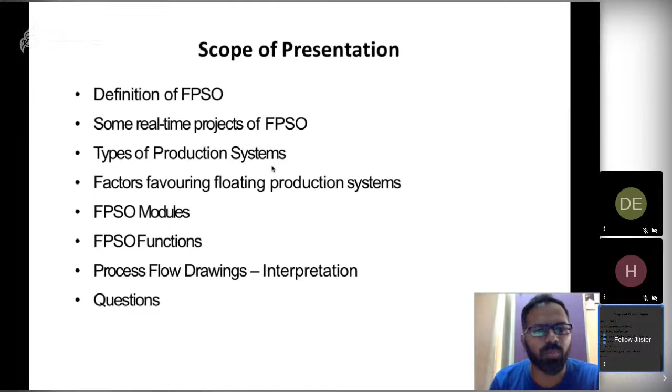So, basics of ships and offshore production, a brief process overview. That's the presentation topic for today. The scope of the presentation, what we're going to see today: we'll see why FPSOs are used in offshore production, some data and projects of FPSO, types of production systems, what are the different types they use in offshore production, and what is the factor that is favoring the use of offshore production. In offshore production there are a lot of modules, so we will see a few modules that are used in offshore production, their functions as well. And I'll give you an interpretation of the process flow diagrams, and we can move for questions. If I run a little faster, just correct me to slow down so I can slow down. So this is pretty much the scope of the presentation for today.

And okay, asking everybody a question. About 2/3 of the surface of the Earth is covered by water. So it's actually about close to 71%. So we have the remaining close to 29% land area. So we have refineries, oil exploration, drilling of oil.

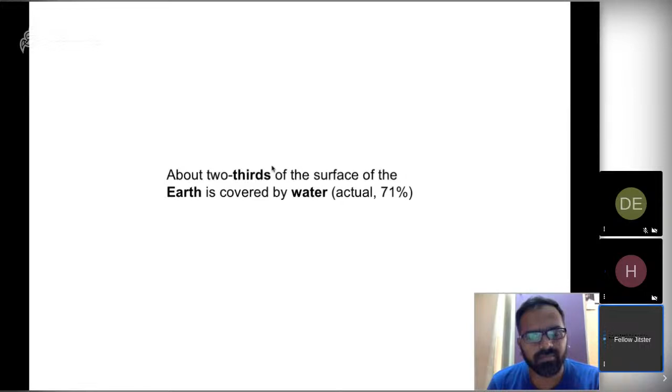Excuse me, sir. Yes, sir, there's some bandwidth problem, I think. Can you please turn off your camera and then present it? Yes, sir, because the camera also tries to take some bandwidth. So try to turn off the camera and then go for the slideshow, sir. Okay. I've turned off the camera. Is the slide visible now? Now we have some clear audio. The slide is available, okay. Is the slides visible? Okay. Yes, sir, okay, can I proceed now?

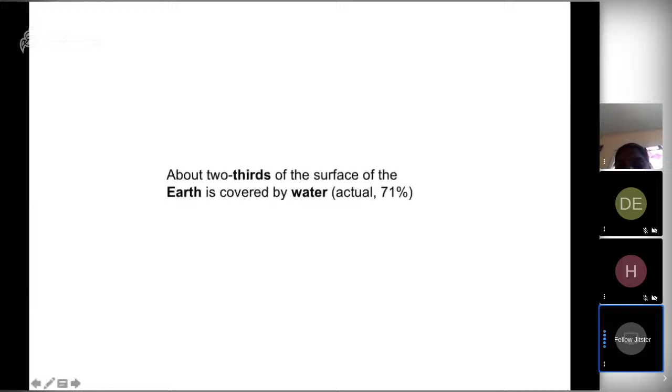Okay. When it comes to drilling and production, there is a difference. Drilling is exploration. When you want to find out if a particular area has oil or gas, it is called drilling. When you already found out that there is oil in that particular location and you start producing, it is called production. So drilling is done by drill ships. Production is done by FPSOs. So FPSOs are not drilling vessels but production vessels.

After we have found out there is oil and gas in a particular well, we move the FPSO to that location and start producing. Whereas drilling is done using drill ships and semi-submersible drilling vessels, which find out there is oil using seismic studies, then drill the well, confirm there is oil, cap it, and move on. So there is a difference between drilling and production. That is to be known. Next is how they drill it.

Okay, now we have found a particular GPS location in the Indian Ocean where the seismic study has confirmed there is oil and gas. In a well, there will be oil, gas, and water, all mixed together in ratios. If the oil ratio is high and gas and water are low, it is called an oil well. If the gas ratio is high and oil and water are low, it is a gas well. If only water content is high, it is just a normal water well, and it will not be considered for production. It is not feasible to spend so much money for that little oil and gas, so they will not produce from that well.

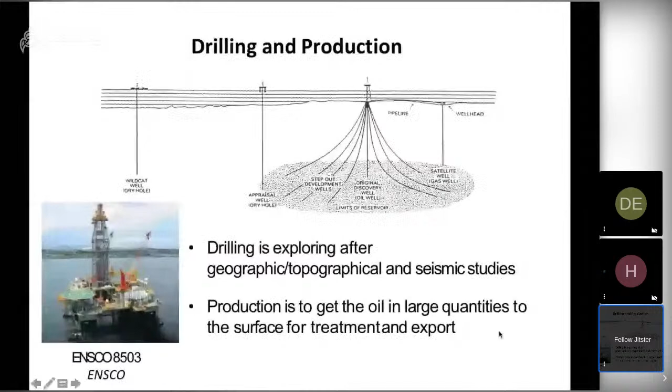After this drilling is completed, the casing... Excuse me? Excuse me, sir? Yeah. Sir, if you are changing slide, we are not able to see the changed slide. We have only the second slide available. Can you see that now? About 2/3 of surface, that slide alone is available. How do I do that? Can you see now? No, sir, it's a blank screen. Now it is available. Drilling and production. That slide is available. I'll change slide. Can you just check if it's changing? Is it changing now? It's changing now. It is changing.

Okay. So this is the about 2/3 of surface of water. This is the slide. And then I was talking about the definition of FPSO. Then we have examples of FPSO. So you can take down the names of these FPSOs and Google it for more information. The next slide is drilling and production. The difference between drilling and production, this is what I was talking about.

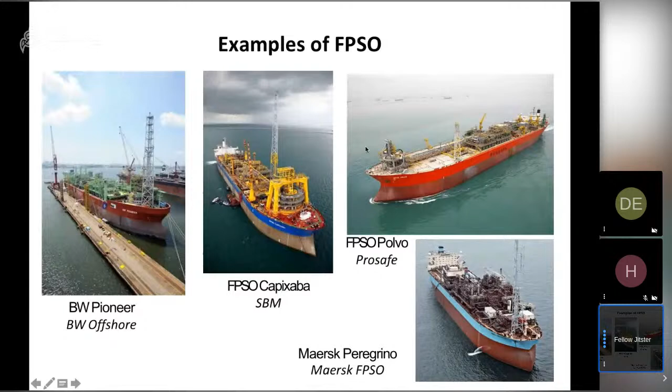Then we have to find out how it is done. So how is the drilling and casing done? Using a semi-submersible drill ship or a normal drill ship, you do the drilling and you case the drilling site with the mud and cement casing. This is normal unidirectional drilling, but nowadays we also use horizontal drilling and directional drilling. So if it is unidirectional drilling, like how you have a borewell in every house, everybody has to do a borewell individually.

But when you have a neighbor and he drills 500 feet and he does not get water, whereas in your house you drill only 100 feet and you get water. The neighbor is just 20-30 feet away from your borewell. So what he can do is a directional drilling from his house towards the well from which you are getting water. He can drill through his house floor, but turn his direction after 20 feet, move diagonally towards your house well, and he can pump water.

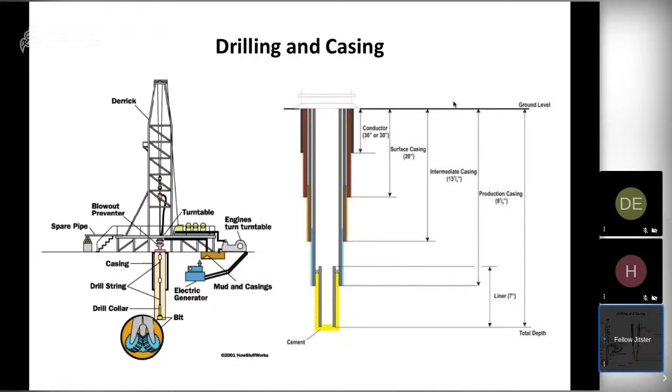So similarly in drilling, you save a lot of money if you do directional drilling, because you don't have to drill a lot of unidirectional wells to pump oil from the same well or nearby wells. Okay, well completion. When you have found out through seismic studies and other geographical studies that there is oil in this particular part of the world, then you move a drill ship or a semi-submersible drill vessel, drill a hole and find out, okay, there is oil here. This is good for production.

So after that is ready for production, you decide to plug or complete the well. Plug is just plug the well, move the vessel out and start producing after 5-10 years, because now I don't have money to produce. Otherwise, you decide, now I have found oil here, I'll immediately start production. So if you're not producing immediately, you plug the well. If you're producing immediately, you complete the well. But how do you complete the well? You remove the blowout preventer.

Blowout preventer is a kind of non-return valve which sits on the top of every well before production. So if you decided to produce oil from that well, the blowout preventer is removed. You fit a Christmas tree. It is just a valve manifold, a big manifold with lots of valves, so that whatever comes out of the well, crude oil, gas, and water, is directed through many pipelines. That is called the Christmas tree.

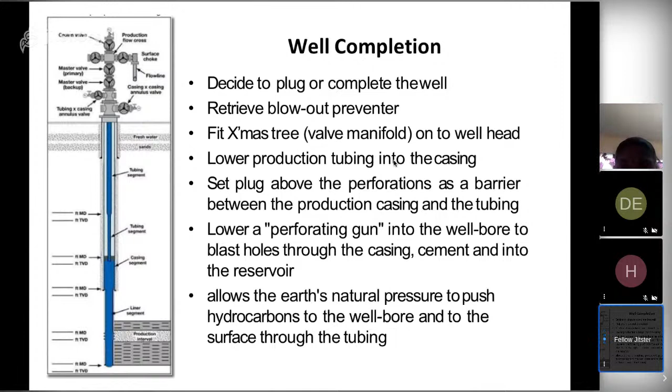Okay, we have different types of production systems in offshore. This is basically decided on the environmental condition. If it is shallow water, only 100-meter depth, then you decide to go with a jack-up rig. The jack-up rig is a rig which has 3 legs, which jacks up on the surface of the earth and then starts producing. Then you go to tension leg platforms, which are platforms which float on the water, and then a mooring line is fixed to the seabed, and then you start production.

If the water surface to seabed is 100 meters to 150 meters or 200 meters, up to 300 meters, you can use jacket rigs. Beyond that, you use tension leg platforms up to 700, 800 meters below water level. And then above 1000, you start using drill ships, FPSOs, or semi-submersibles up to 3000 meters. So very deep sea drilling is mostly done by semi-submersibles, and semi-submersibles are the biggest capacity offshore production platforms. So that is the different types of production systems used in offshore, and we are concentrating for today's topic on FPSO alone.

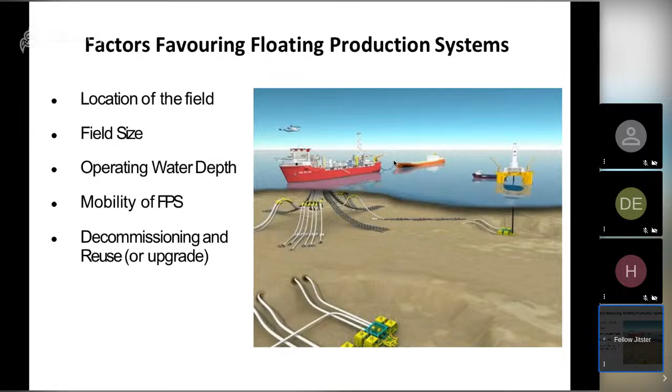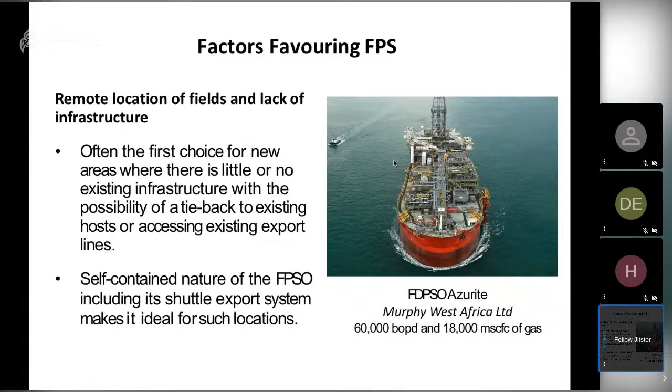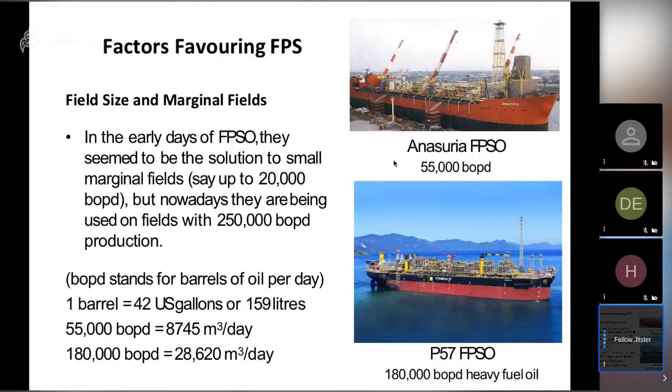Like today, the ship can sail, anchor, and start production from tomorrow morning. So that is how quickly an FPSO can start production. That is the advantage of using an FPSO. The field size and marginal fields: even for small fields where the capacity is only for 2 years or 3 years, you can still use FPSOs because it can be decommissioned and moved to a new location very easily. So FPSOs are favorable for all reasons.

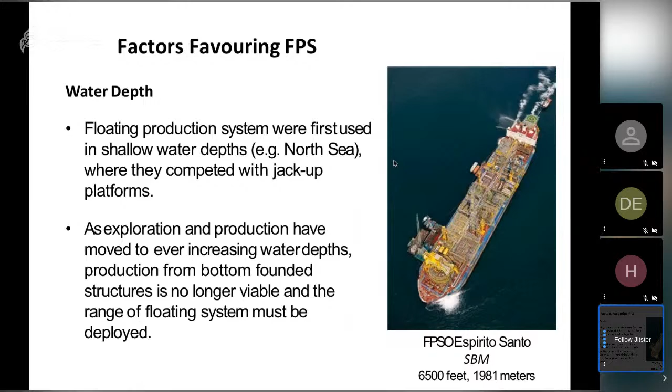So as exploration and production have moved to increasing water depths, production from bottom founded structures is no longer viable, and a range of floating systems must be deployed. So there's a lot of new exploration and new areas where FPSOs are used. Very fast. 8 knots is like 16 kilometers per hour. So from this part of the world, in 15 days you can move to the other part of the world. So an FPSO can sail to new locations faster.

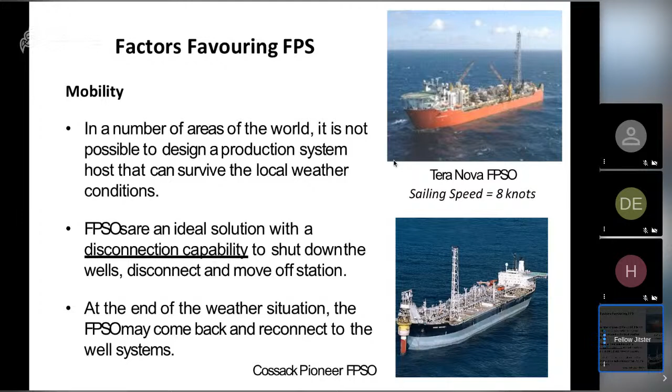It can disconnect. It can be decommissioned very fast. It can work in all weather conditions, very bad weather conditions. It doesn't matter. It is a ship, so it can sail and stay there, anchor, and start production immediately. So these are the benefits of using an FPSO. At the end of the field, the FPSO is decommissioned. Like after 10 years, the well is empty. There is no more production capability. It can be immediately decommissioned in a few days' time and moved out to a new location.

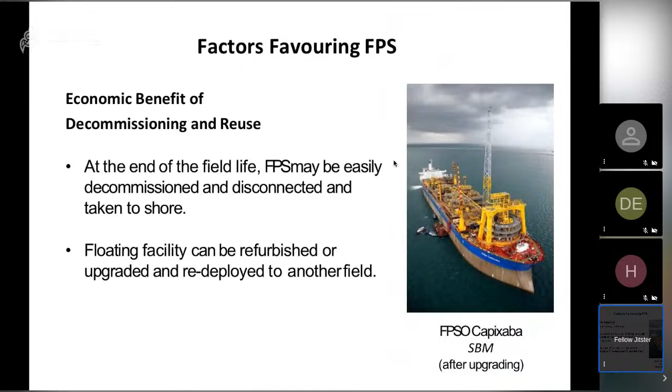The advantages of FPSO in a summary. So the economic benefits of utilizing and upgrading floating facilities. It is not a new ship which is built from cutting the metal. It is an existing ship which is already 20-25 years old. We take that ship and convert it into an FPSO. So it is like buying an old car or a bike and changing it into a floating refinery. So it becomes economically beneficial.

In many cases, in remote areas where other vessels cannot go, this FPSO can go there and start drilling. Even for small fields, only 1 year or 2 years of production, installing other vessels is difficult, but you can move an FPSO and start production. The water depth is not an issue, climate is not an issue, small periods of production and small capacity wells are not an issue. So there's a lot of advantages of using an FPSO.

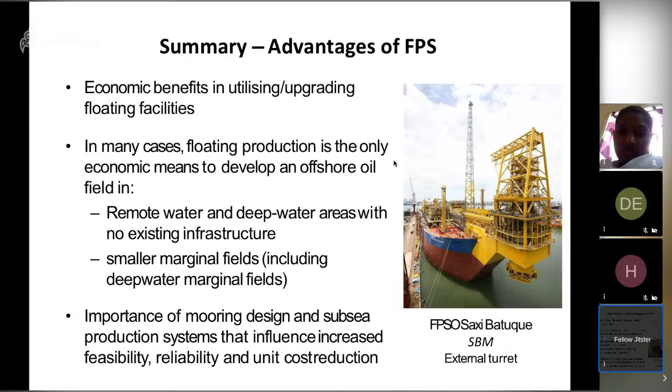Okay, how is a vessel converted into an FPSO? This is the basic structure of an FPSO. As I earlier mentioned, it is normally an existing vessel or a ship which is converted into an FPSO. So you have a ship which is 20-25 years old. You take that ship, take out all the top modules, clean it off like a normal football field, and then you plant every module, one module by one module.

The two higher structures, hope you all can follow my mouse. This is a turret and this is a flare. This is extra gas which comes, it will be burnt. This is a flare stack and this is a turret. So this is an internal turret. There are FPSOs which have an external turret, like a cantilever beam on a basketball hoop. So in some ships, this turret is positioned outside the hull in this area, but in most cases it is done like this.

As an engineer, I prefer ships which have an external turret because it is easy to have these mooring lines and incoming pipelines visible all the time above the water level. In these FPSOs, all the mooring lines and anchoring lines are below the water line all the time, and you have a lot of difficulties in maintaining the pipelines and production lines.

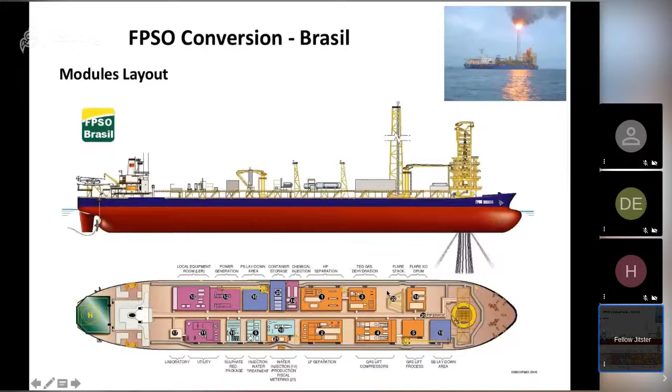Oil separation is done in module 1 and module 2. Here you have 120,000 barrels of oil per day that is done in the first and second module. Gas compression and treatment system is done in modules 4, 6 and 7. So 118 mmscfd of gas is produced in modules 4, 6, and 7.

Water treatment systems are in module 9 and 10. We have 90,000 BWPD of oil water that is treated for re-injection into the well.

Utility and power generation is almost 6 modules, and Alstom is the one monopoly which produces power generation systems for FPSOs. Most of the companies associated with FPSO equipment supplies are monopolies. There is no competition there, because they're age-old companies which have learned a lot of things and patented it, so it is very difficult for a new company to come and compete.

So Alfa Laval is for separators, Alstom is for power generation, Wärtsilä is for automation. If you're an instrumentation engineer and want to pursue a career in automation, you should look into this company called Wärtsilä. Wärtsilä is an engine manufacturer; MAN B&W and Wärtsilä are two monopoly companies, like Alfa Laval, ABB.

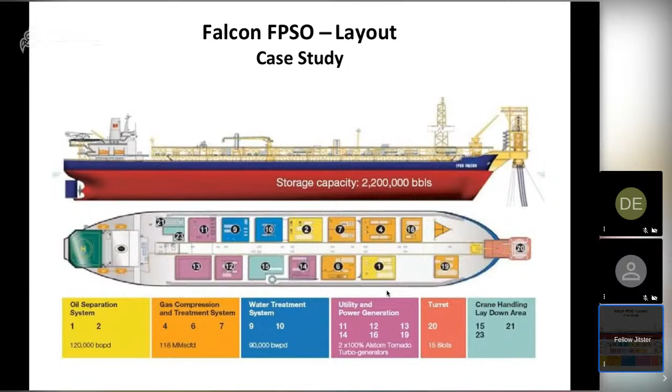Most of the instruments are Georg Fischer Instruments or ABB. These are the two companies which provide instruments. On land-based refineries you'll find a lot of other companies competing, because to get approval for a product in a land-based refinery, many companies compete and easily get approval. But for an equipment to get approved by IMO, the International Maritime Organization, and to be installed on a ship surface or floating rig is a big process. So it is very difficult to get into that market, and they usually have only 1 or 2 companies that do it.

FPSO Falcon is an example of conversion, where a normal ship is converted into an FPSO. This works for ExxonMobil; that is the company.

Process equipment - what are the process equipments used in an FPSO? On the turret, you have the FPSO mooring system. The turret is where the entry of production oil comes into it. In this ship you can see an external turret, which I was earlier mentioning. The advantage of having an external turret is that the pipelines and mooring lines are always visible. From an operational perspective, as an engineer, I prefer this, and this is better.

Top sides - the top of the ship is called the top side, and the top sides have modules. As I earlier mentioned, oil, gas, and water processing facilities are on the top sides.

What happens in the bottom part of the vessel? In the bottom part of the vessel is where whatever produced oil is stored. So crude oil storage, accommodation, services - when you say services, close to 25-30 people live here on the ship, so they all have to stay here. This is the accommodation block.

Here they have a kitchen, a gym, and a normal life after work can be here, and they also have an engine here for moving from one place to another. We have an auxiliary generator for power, and all this is in this part of the ship.

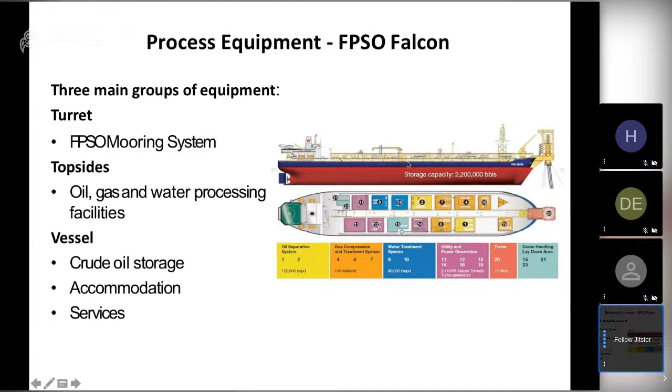So to look into a turret, this is an external turret - I like the external turret, and sometimes they also call this a riser. It serves as a mooring system to which anchor lines are attached - all the anchor lines are attached to this, along with production lines. This allows the vessel to freely weathervane, like it can take a 360 degree turn like a compass, and move around due to weather, wave, or wind or any environmental conditions.

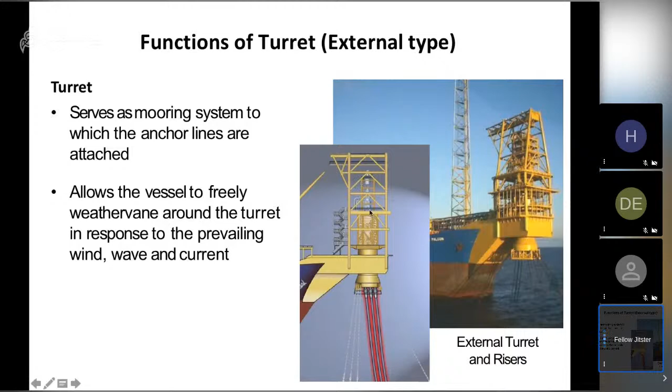So this is the turret which we already saw. Again, this is an external turret, which is outside the ship's hull. This is an internal turret, which is inside the ship's hull itself. So these are just to show external and internal.

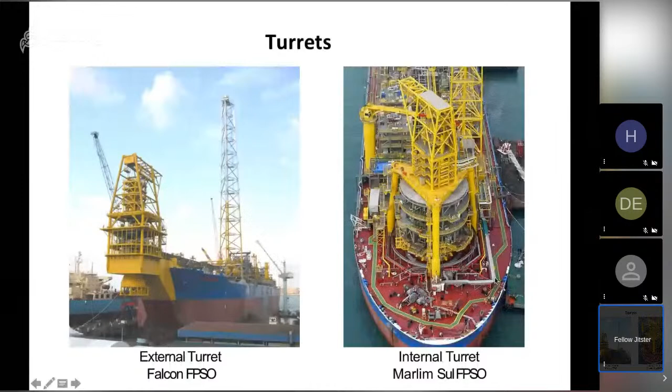Swivel - this is actually a part of the turret. It conveys incoming fluid, which passes through the swivel first to the fixed part and then to the rotating part of the turret, and to the topside processing facilities. It comes in at high pressure, so it rotates and separates at different pressure levels to the rotating part of the turret and to the topside facilities, where we separate using a high pressure separator and low pressure separator to separate oil, gas, and water.

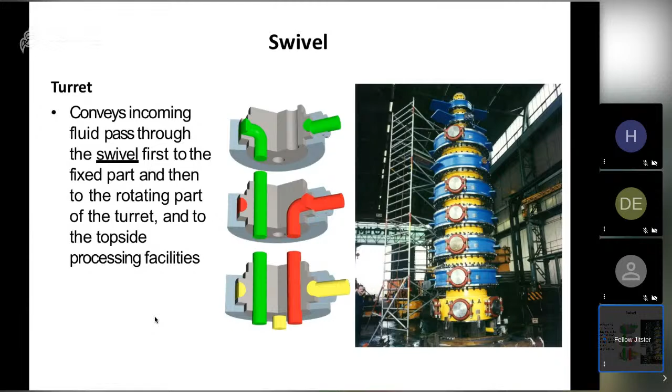Functions of topside processing equipment. Oil comes through these lines to the turret, and from here it moves to module 1, where oil, gas, and water are separated. Then it goes to the high pressure separator, then the low pressure separator, where again oil, gas, and water are separated, and further goes into the storing capacity.

After all the oil is stored in this part of the ship, a tanker ship comes - you can see a small ship here behind, but it's actually a big ship, it just looks smaller in the picture. So every 2 or 3 days, depending on capacity, the production stored in this FPSO is transported to this oil tanker, which takes the production to the nearest refinery, maybe Reliance or wherever. If it's in Africa, Saudi, or Iran, it moves it to the nearest location.

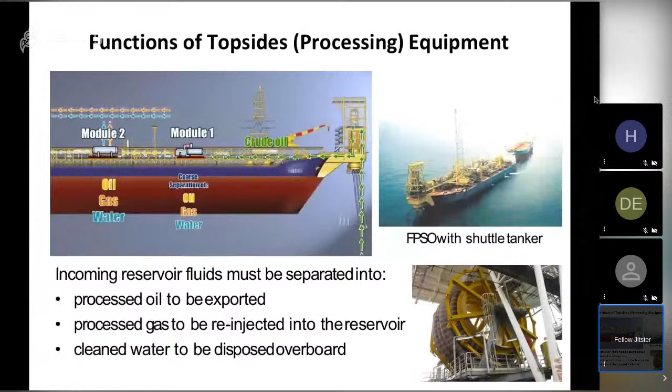You have all safety checks done, and then the complete module, for example module 1, is completely lifted and placed on the FPSO. This is manufactured in a shipyard by module. Module 1 is manufactured, then lifted and placed into the ship. Then module 2 is manufactured, then lifted and placed into the ship.

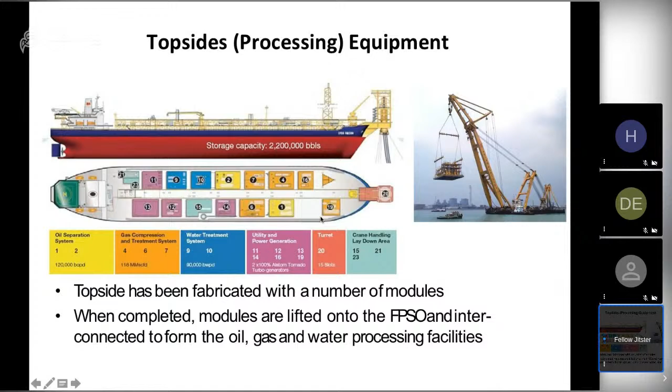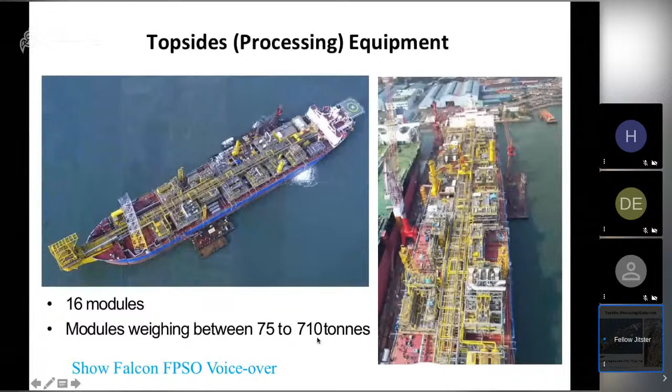So how many modules are there? There are close to 16 modules on an FPSO topside. How much does a module weigh? It weighs about 75 to 710 tons each, depending on what process it does. Module 1 has the HP and LP separator - I already talked about this. High pressure separator and low pressure separator - these are the two separators in module 1.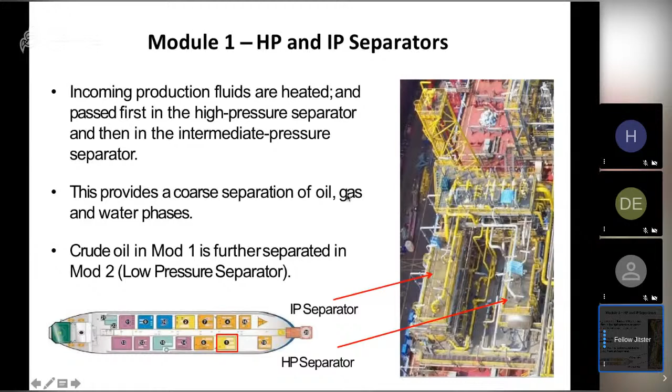You have different technology according to site requirements - if the crude has different qualities, you use different types of separators. This is a horizontal 3-phase separator, high pressure. Then you have a low pressure separator in module 2, where the produced products of module 1 come in, and the same separation is done but at low pressure, since water, gas, and oil are already mostly separated. Now you want to further refine it - remove small water droplets in oil, remove oil in water, and remove gas. That's what the low pressure separator does, and then the produced oil moves to the cargo tanks. All over the bottom there are cargo tanks used for storing the production from module 1 and 2.

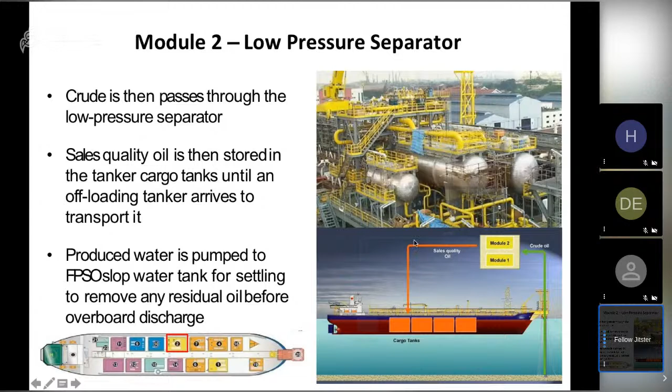The high pressure gas compressors - when it's a gas field, or you want to use the gas for oil power production on the ship, you use module 4, where gases from module 1 and 2 go to the module 4 gas compressors. When you have to maintain and sustain well pressure, you re-inject the gas into the reservoir itself. But in some cases, if you don't, you inject only water and flare the gases.

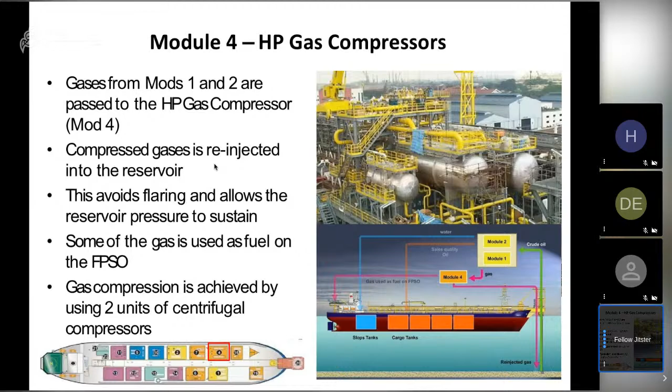Module 7 is for flash gas compressors - you use screw compressors in this module to flash the gas as required. Low pressure gas, separated from crude oil in module 2 and the separator in module 1, is compressed to a pressure where it can join the produced gas at the inlet of the main gas compressors. So depending on the situation and requirement, this is basically where you either flare the gas or use it, and this is done in the flash gas compressor.

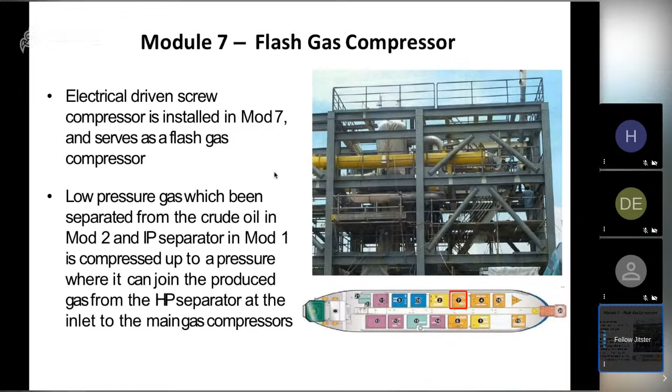You have screw compressors, another type of compressor where high pressure gas from the main gas compressors must be further processed to remove water. To remove the water, you inject it into a screw compressor, which removes all water particles from the gas. This drying is achieved by module 6, where glycol is used to absorb the water. There are different chemicals according to the requirement. In this particular site, glycol is used, whereas in another site where the gas composition is a little different, glycol plus certain other chemicals might also be required to absorb the water.

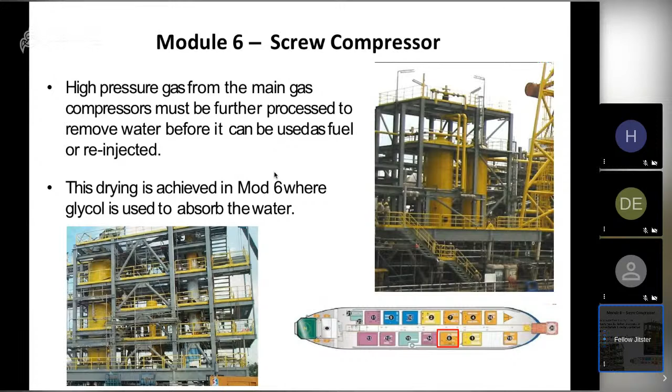When you have this kind of offshore refinery, you will need a lot of heating and cooling utilities for pressure, and to maintain the pressure lines, the steam lines and all that. Crude oil needs a certain temperature to move; at normal room temperature it will be frozen, so it has to be heated. So all the pipelines used for transporting crude oil from the production lines to the storage lines are heating lines. All the pipelines have a heating coil and then are insulated, so users can touch the pipe and nothing will happen, but the pipes are always heated so that pumping and movement is achievable.

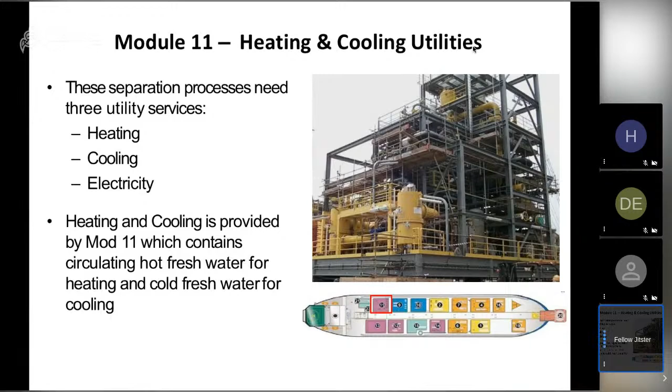Siemens has a gas turbine, SGT 500. SGT 500 is the only gas turbine in the world which can run on crude oil as a fuel. We also have gas turbine research going on in India for the last 25 years, and the name of the gas turbine is Kaveri. India couldn't fund the project after 20 years, so now France is funding the project. I work on a working group on that, and the project has been put on hold for a long time. That is also a gas turbine which can work, the lightest gas turbine India is manufacturing, being worked on at GTRE in Bangalore. So this is something related to gas turbines.

When that gas turbine comes into application, you'll be using such a gas turbine. But as of now, in the market, you have the Siemens SGT 500, which is the only gas turbine in the world that can run on crude oil as a fuel. So you need a lot of power, so you need a gas turbine to manufacture power.

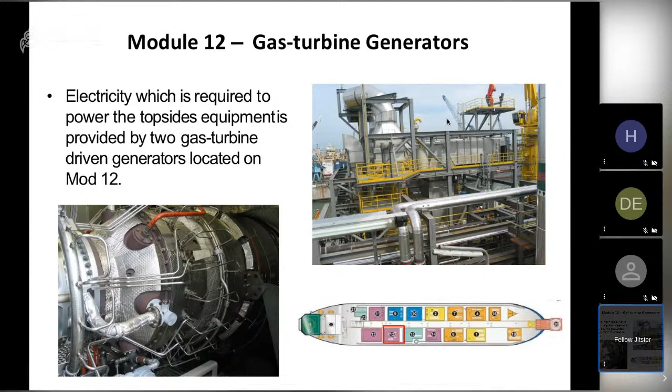These are local equipment rooms for purpose, like you have to have a power distribution to all switch gears located inside the equipment rooms. You need a lot of air conditioning and all that is there. So you use a local equipment room as a module.

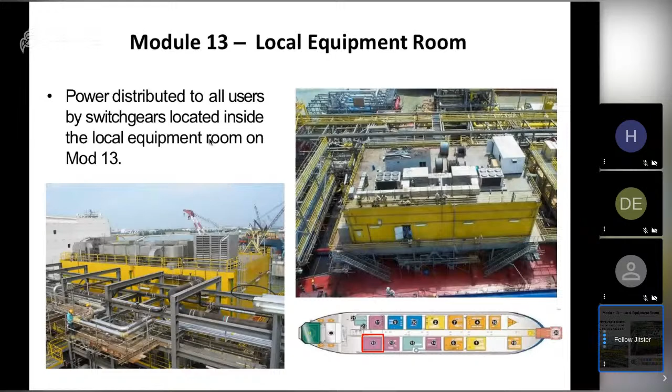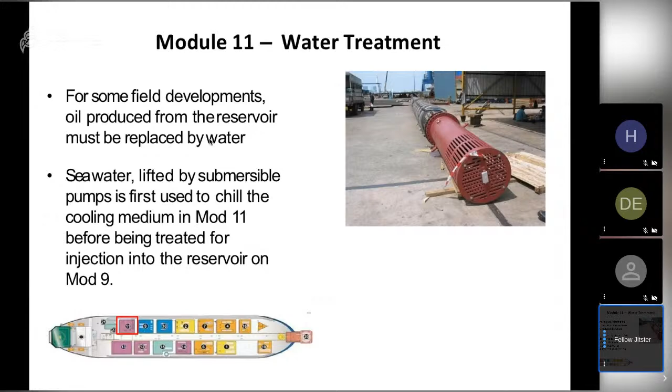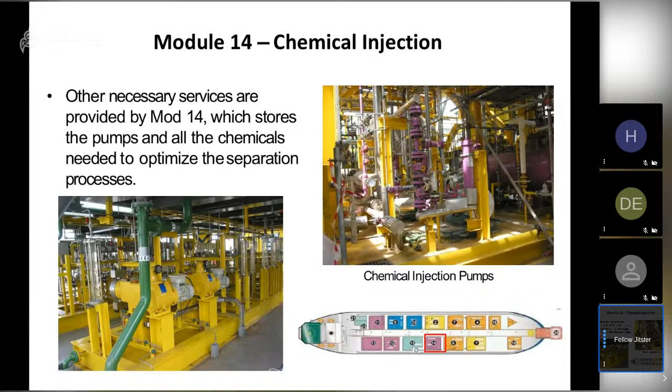You need methanol injection. Okay, gas hydrate is a completely different process. Methane hydrate, sometimes they call it methane hydrate or sometimes they call it gas hydrate. This is kind of a complete chemistry thing where methanol storage and related pumping equipment, test separator and the storage of dispersants are in this module.

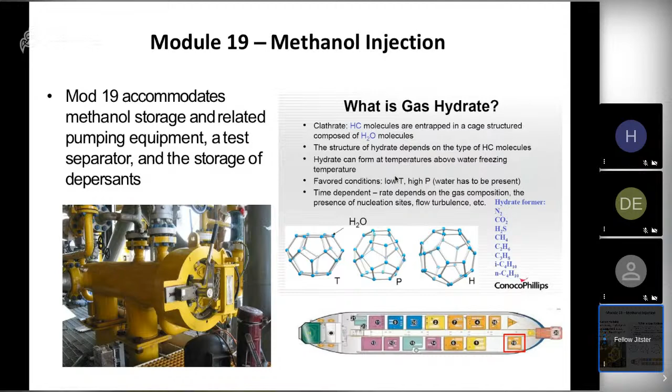This is more of an R&D kind of system where, on a daily basis, you take a little amount of crude oil and test the quality of it and tell, okay, this is the amount of crude oil, water and these chemicals coming out. So you decide on the production, okay, this is how our yield is going to be. So this is kind of an R&D setup module, methanol injection module.

Okay. So again, going back to module 1, this is how the primary production system works. When well fluid comes, it goes to a high pressure separator, gas goes to a compressor, oil goes to a low pressure separator, water goes to water treatment. The low pressure separator sends whatever gas comes here back to the compressor and gas dehydrator and pumps the gas to the pipeline.

But if this is a very small quantity, it directly goes to flaring and it is flared. After the treatment, water is discharged or re-injected into the well based on the requirement. Oil, after removing the further gas, has the water separated as well. It goes to the storage, which is below the FPSO. So this is oil dehydration using chemicals, and then the oil goes to the liquid pipeline or to the tanker to the refinery.

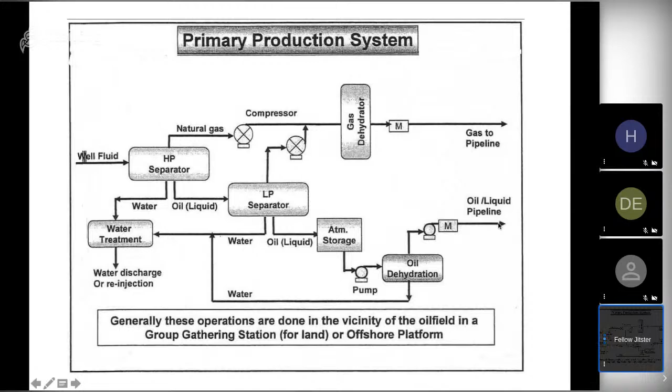You will have to see a complete setup of the modules as well. So I'll show you this.

Can you see the construction module? Harisha, can you see the construction module? Hello? Can you see the construction module slide? No, sir. Which slide do you see, ma'am? Sir, the screen is plain now. Okay, ma'am, I'm sharing it again. Can you see now, ma'am? Yes, sir. Now you can. Construction module 1, sir.

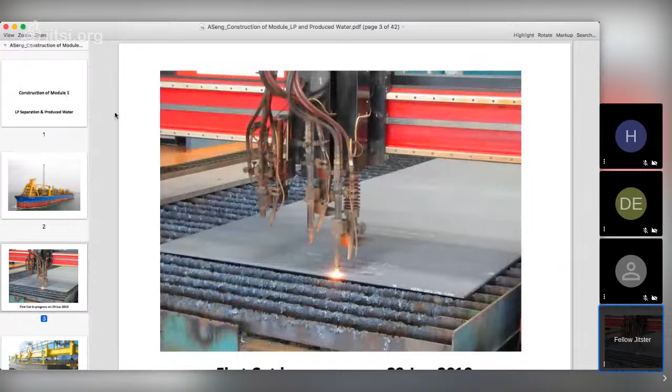Yeah. So now we will see how a module is constructed in a shipyard. This is module 1. We are going to see only one module, and I will go through the complete process of how a module is manufactured in a shipyard. So this is an FPSO, and it has complete modules on the top. First you have steel plates, steel cutting it is called. You use automated robots to cut the steel as per your drawings.

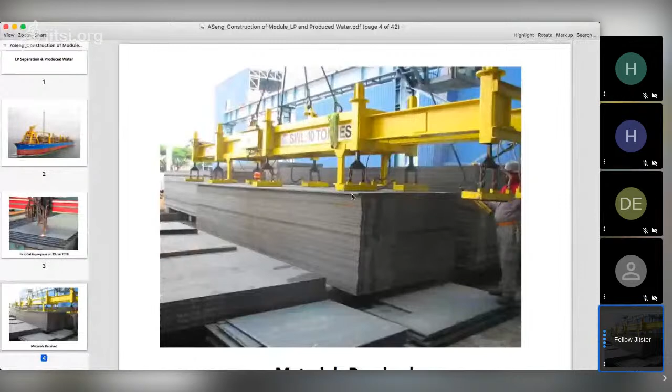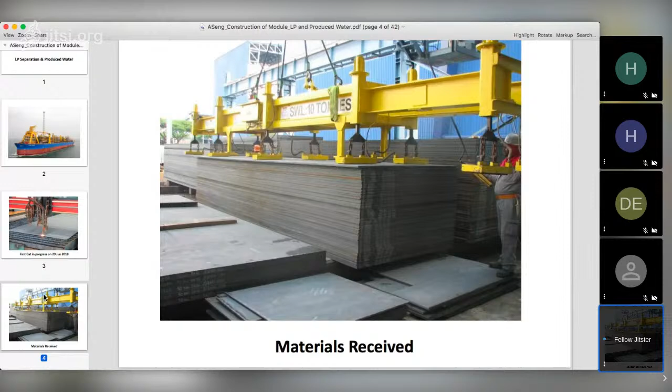The next step is you will have a lot of raw material, a lot of steel plates like this coming into the yard. You will have automated robotic lifting of steel plates. Nippon Steel, from Japan, is a major manufacturer of these steel plates. So materials come into the yard, they are lifted using automated lifting systems, and then cut according to the drawings using automated robots.

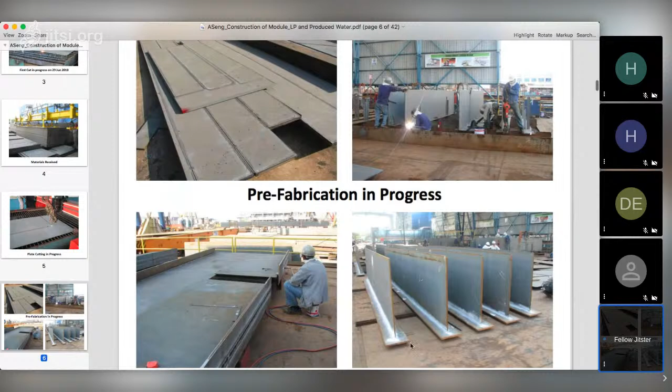Then you have prefabrication in progress. You use automatic robots and also welding labor to cut and build a prefabrication of module frames. Each frame is built, then you have further fabrication of each frame, each section frame is aligned, and then support of each section frame is provided, for the welding.

This process of producing a module takes a team of 100 to 150 members close to 1 year for the manufacturing of one complete module. Most of the equipment installed in these modules is not off the shelf; companies like ABB don't manufacture and keep it. They only start manufacturing it after we place an order.

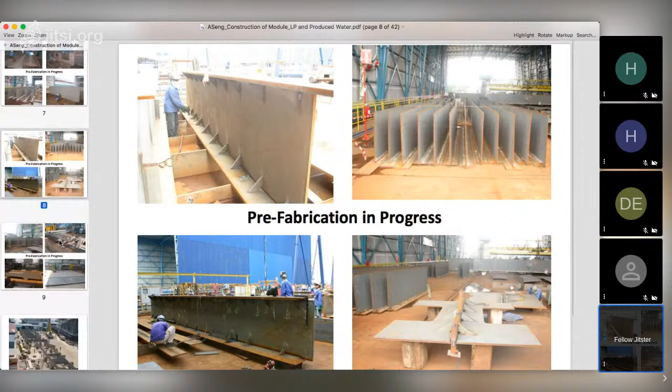This is to keep the cost low. If it is produced and kept on the shelf, the product cost goes up, so in order to reduce cost, they produce it only on order. Hence, the lead time for this is 6 months, and the module production time is close to a year. So you can see every frame is getting ready. All channels are getting ready.

You can see the assembly of pancake in process. We call it a pancake. When a structure is getting ready, you call these structures pancakes, because you keep one on top of another like a pancake. So you see the assembly of pancake in process.

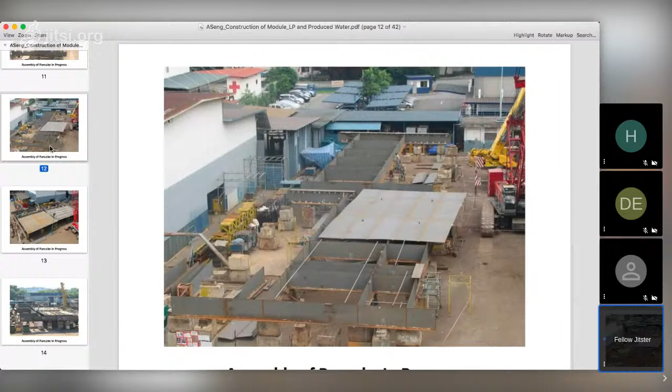This is another. So in every pancake process, you have a frame structure, and then you keep a top, and then you keep another. This is almost like 6 to 7 feet in height. So that is like a floor. So every pancake is completed with a roof.

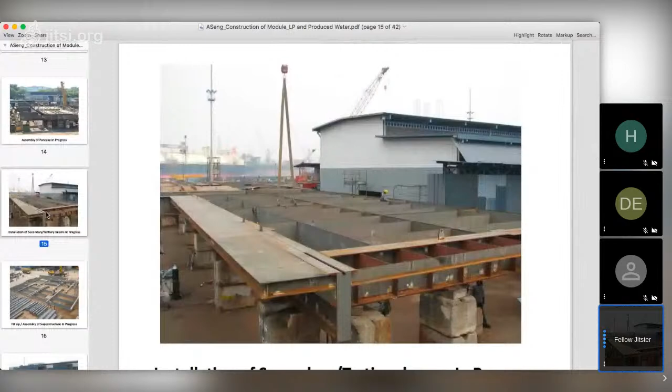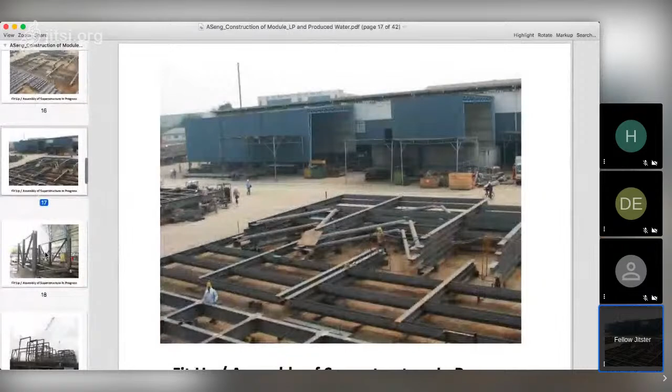Then you have installation of secondary and tertiary beams, and then you connect the channels. Then you connect the beams, and then you put together the superstructure. That is the superstructure. Fit up the assembly of superstructure.

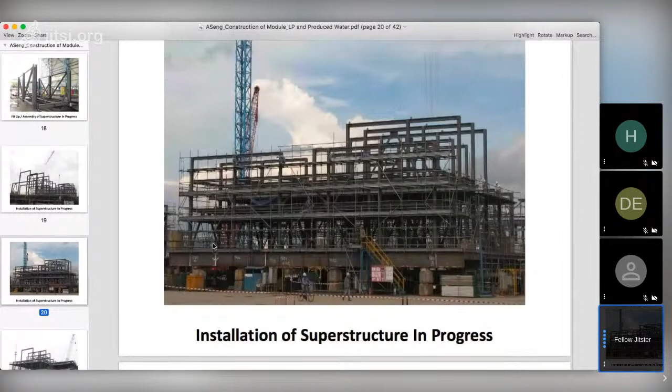So the superstructure is coming up. So the complete installation of superstructure is in progress. These are different views of the superstructure from different angles I'm giving you.

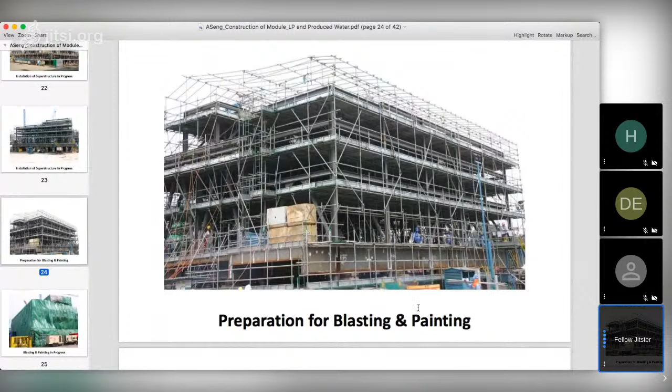If this FPSO is going to be in deep sea or any other water condition, is it going to Europe, is it going to Asia, according to the environmental conditions of that sea, the blasting differs, the blasting technology differs. And then painting also, the customer spec will be there that I have to use paints without certain chemicals like asbestos. The paint has a little percentage of asbestos.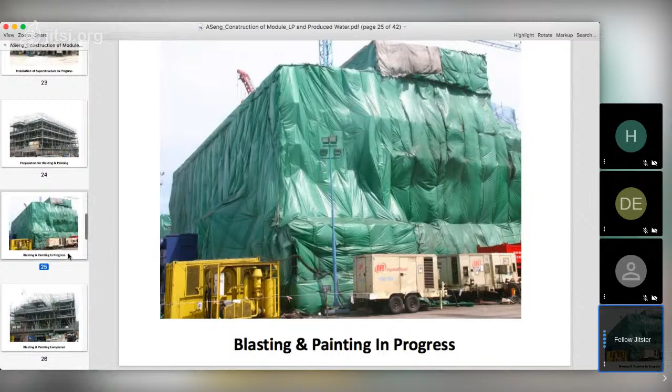Certain companies or customers will come and tell us that you should use a paint which does not have any percentage of asbestos. So there's a lot of ongoing research on the sites when the production happens, according to the customer requirements and field requirements. So when the blasting and painting is completed, the module looks like this.

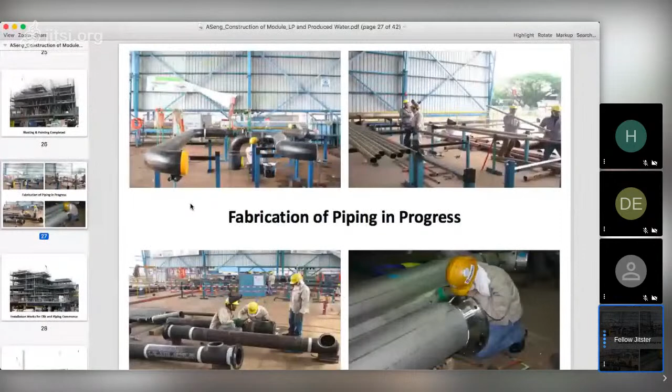Then you start the fabrication of pipe spools. Every piece of pipe is called a spool, pipe spool. So everything is pre-engineered using software. So you will exactly know what is the diameter, what is the strength, what is the welding, and all the spools. Some are rubber coated, some are insulated, heated lines, and all that. All instructions come to the yard. So piping engineers get on the job and do pipe spools.

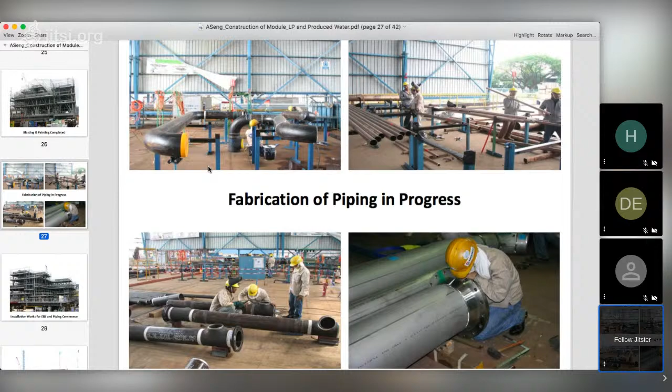When the pipes are ready, they get installed here. After the pipes are installed, then we go for the equipment, electrical and instrumentation and piping commence. So when you do piping, you will be installing flow meters. Then you have measurement devices like valves, control valves, then pressure gauges, temperature gauges. Mostly the variables that you monitor on these lines are pressure, temperature and flow.

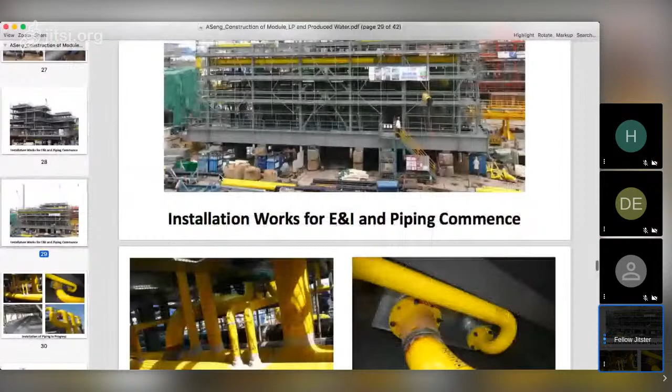In water lines, you will be monitoring PAH, polyaromatic hydrocarbons, turbidity, and sometimes pH. These are the variables which you will be monitoring. Atmospheric temperature at all places will be monitored. So after the E&I and piping commence, you will be seeing more insulation of piping. This is how the piping is insulated. Then insulation work overall, and these are the equipment.

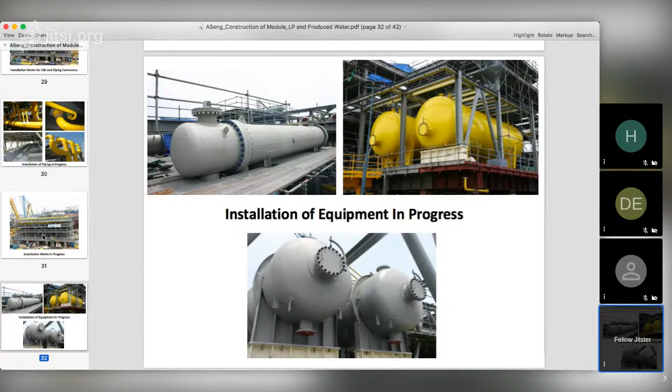So you will see the separators. So when the equipment comes, you install it, and then you can see it painted later. Then the fabrication of E&I works in progress. So you keep the cable trays. You run all the cables through cable trays, cable ladders.

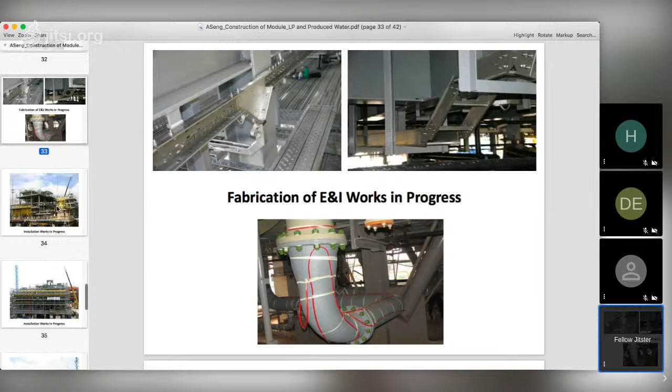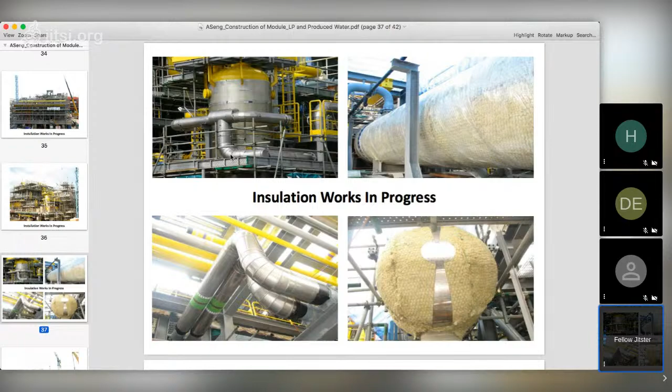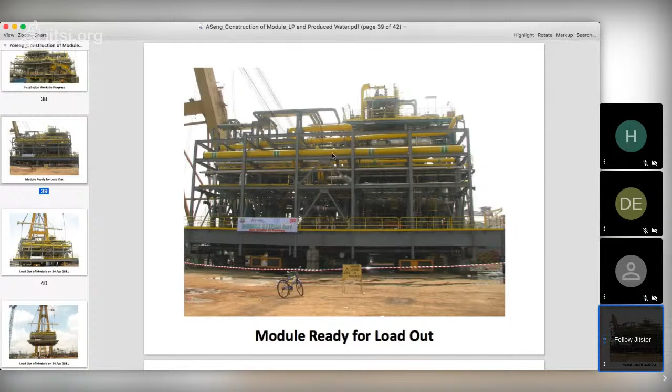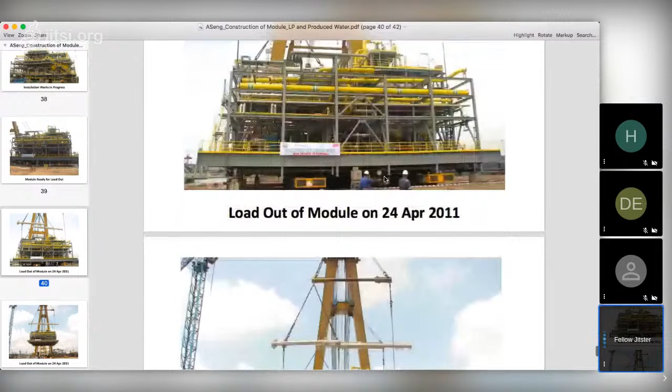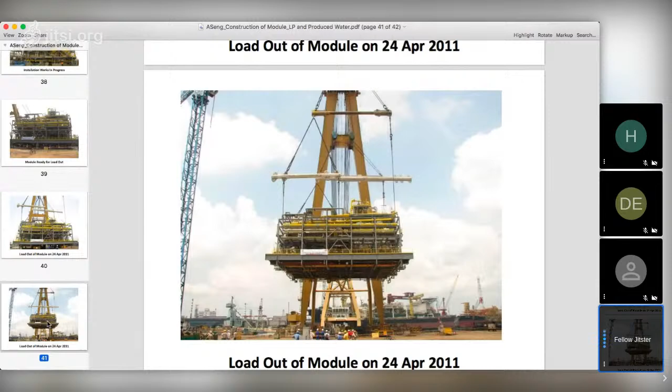So here you can see module Q1 loadout, and Asian Hercules is lifting it. So you can see this heavy lift on 24th April 2011. This was lifted. So this is the complete module being lifted now. So this module is lifted and then placed on this vessel. So this is how every module is built and placed on the top side of an FPSO.

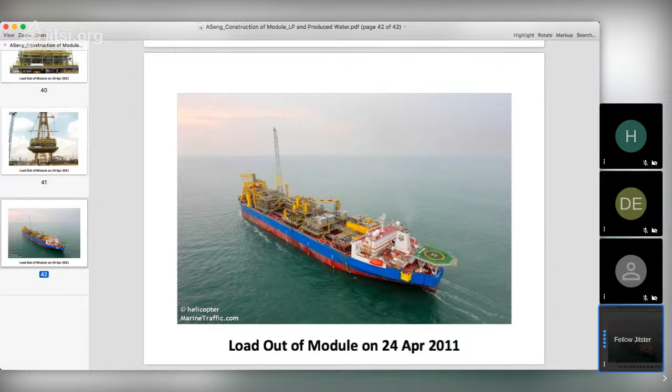So by that, we come to the end of our presentation. Hope I've been okay with the understanding, and hope you all had an overview of what an FPSO and oil production is in the offshore production industry.